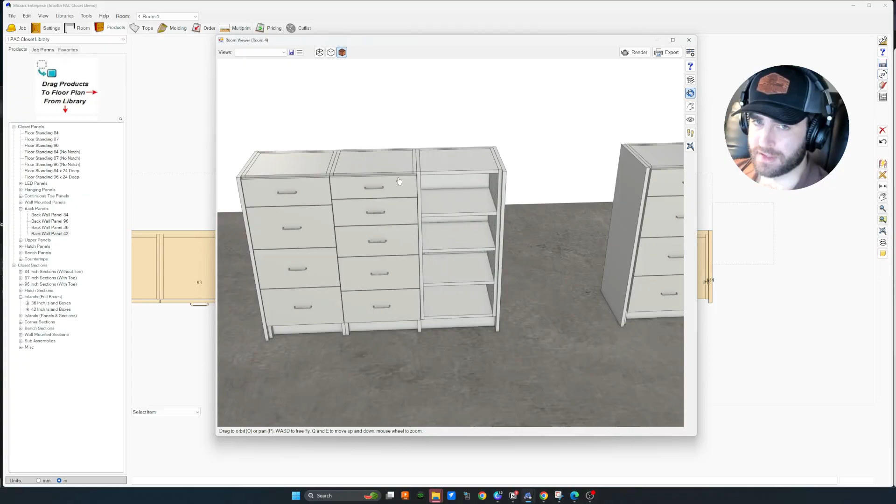Right, we're gonna have more fun with island cabinets. So, PAC closet library sections and panels. So this is the other version; over here to the left is full boxes. There's a bunch of videos on that, 2.5 to be precise. And then on the right here, we are going over how to lay out and manipulate these panels and sections. And I'll try to make it short and concise in case you're using this as a reference document.

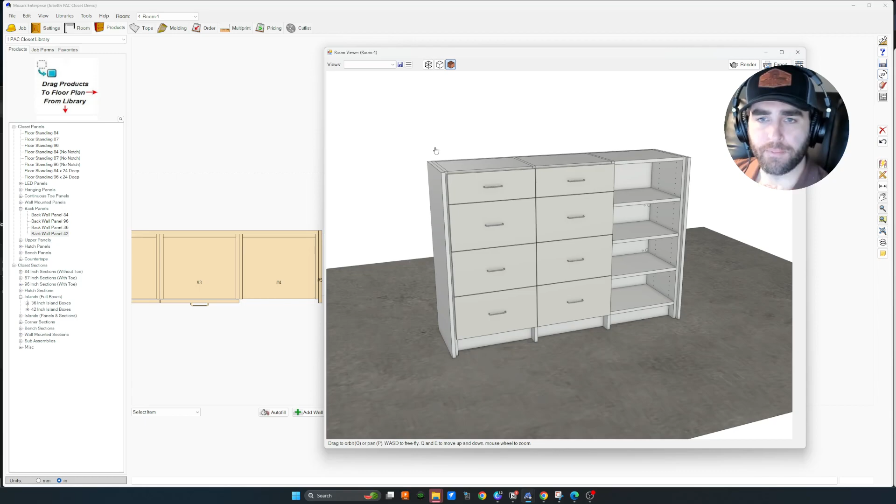So, if we look at this in wireframe, it looks exactly like all the other perimeter cabinets, aside from our full back. So we've got full line bore, we've got outriggers in the toes, everything's looking good. It's kind of built like the full back cabinets, right? So you're going to build this whole island basically on its back and then roll it up, because otherwise it's going to be very hard to put this puppy together.

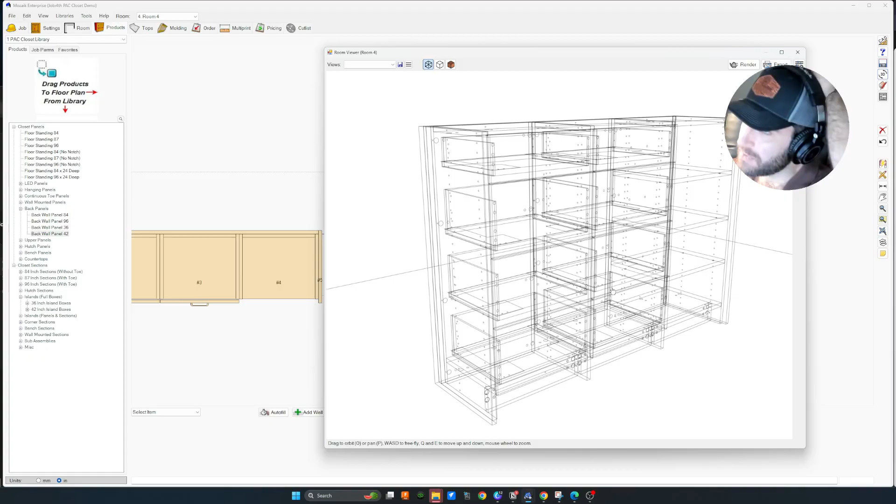And remember, the only reason we're using panels and sections is if we want to hold to the shared panels, or we're looking to flat pack these and send them out to the job site. You could, in theory, actually just put this one together in the shop and then send it out. So whatever you want to do. I would try both and see which one you like if you're new to the game.

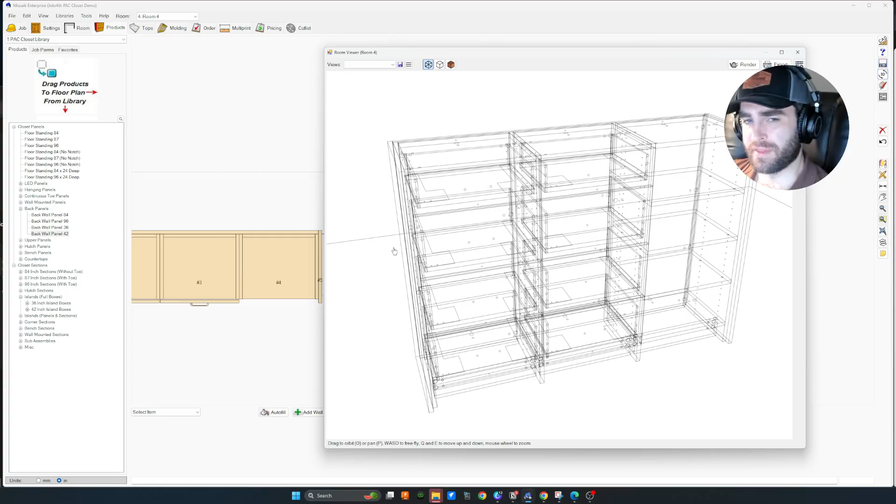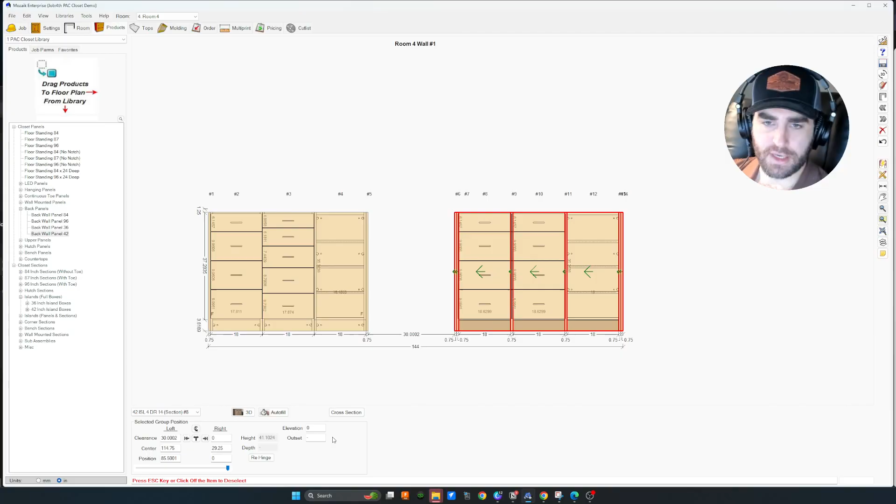All right, so there's not much to change here. They come out the way they are. With the full boxes, we have a bunch of options. With these ones, they are what they are. Now, if we want to lay this out, I'm going to click on this one, go in elevation. All right, let's build this again. So we're going to delete it, and I'll show you how to build out these panels and sections. It's actually really simple, about as simple as full boxes.

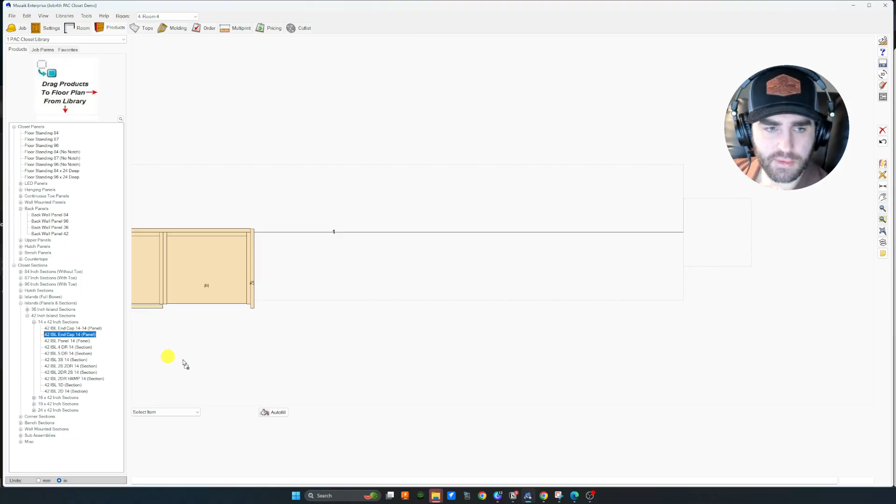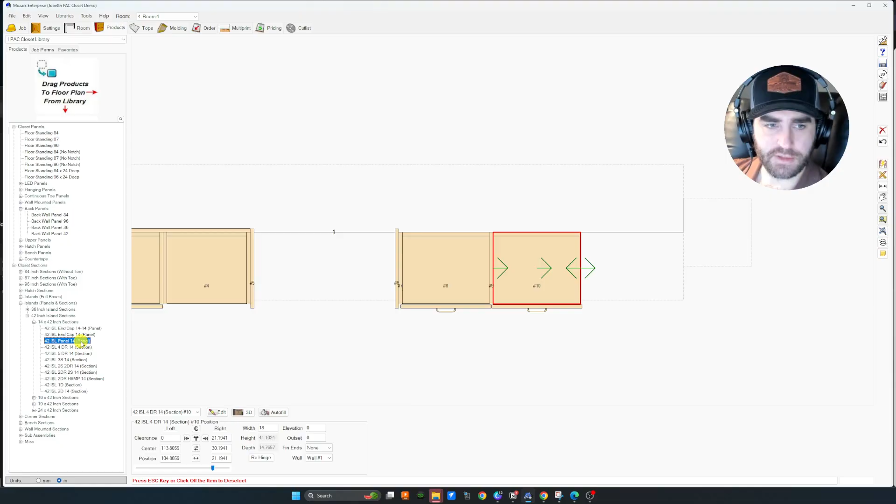All right, so we'll go into islands. We'll go into panels and sections. I'll close up full boxes. Go to 42 and the 14 deep. And then we have this single 14 cap. And then we have a panel. And then we have a section. And then we have a panel and a section, then a panel. Super easy, just like the other one. Kind of like having panels next to sections.

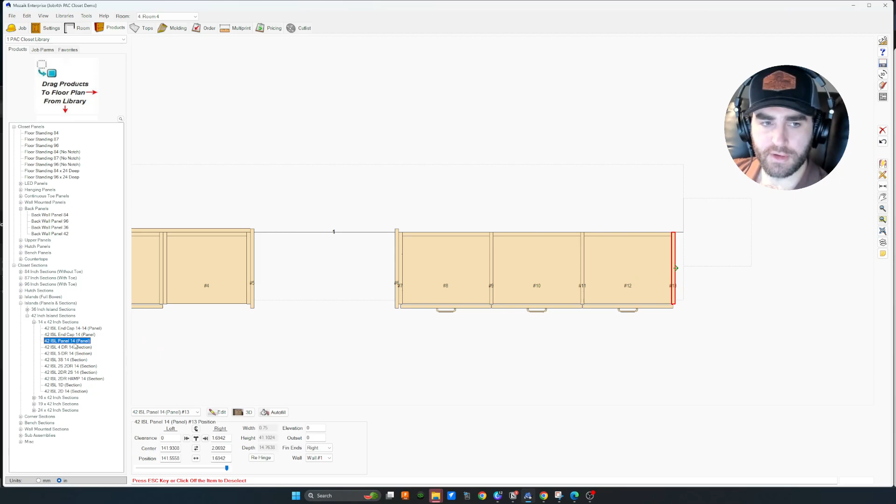All right, bring our section over here. Clicking on the photo instead because it's not really wanting me to pull this out, which is fine. You have to end the section with a panel and an end cap, and then we can put our back on.

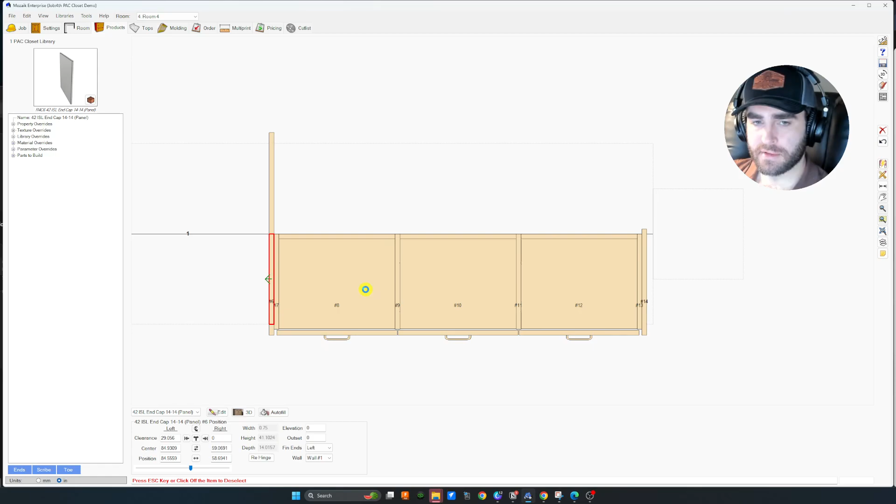Now, maybe I don't need to do a separate video for two-sided. Literally the only difference is if we don't have this single, we have a double. That's what this end cap 1414 is for. And when it comes out, it's basically identical on the back side so that you can put a 14 back there. But I will make another video on the end caps. Hopefully you're just doing a 1414 for now if you're doing a double. Okay.

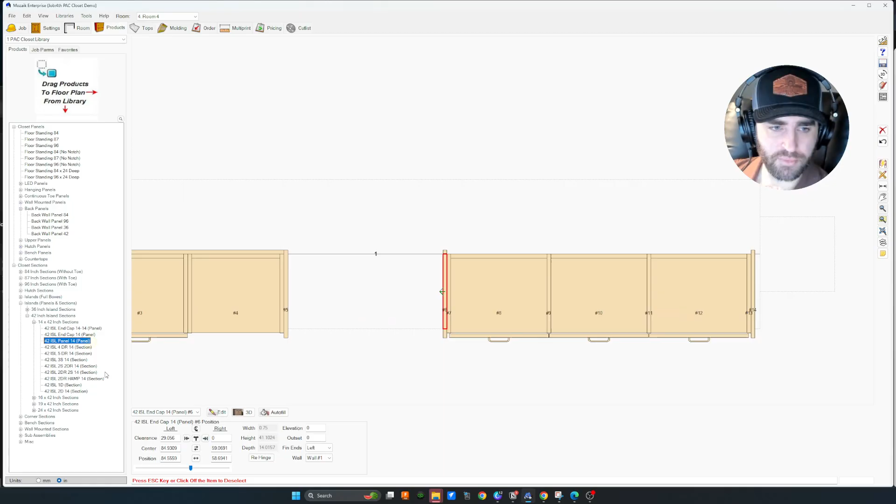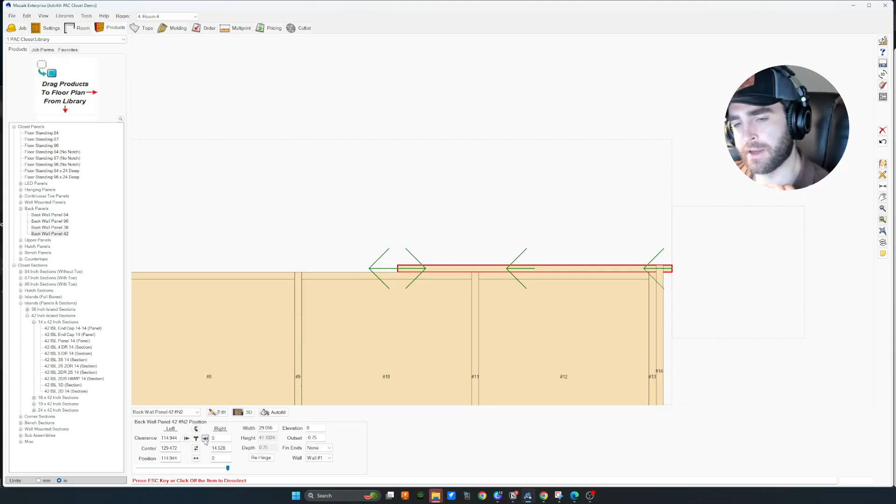So I'm going to put this back. And we're literally almost done aside from just putting the back panel on. So super simple. I'm going to go up to panels, back panels, pull in the 42. I like to pull it in on this wall. Give it a negative 3/4 offset. Drag it over. And then if you notice, if you bump to the right, it's not going to collide with these end panels. It has no idea that's there because the red bounding box is not in the way of it.

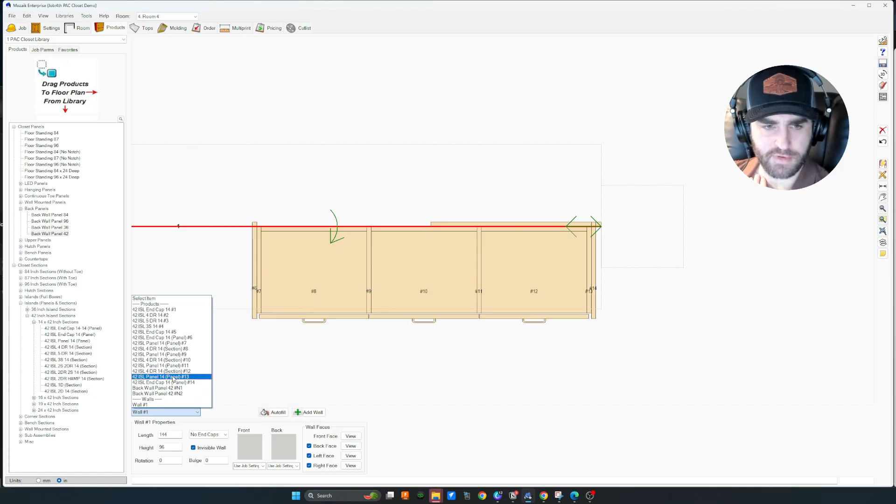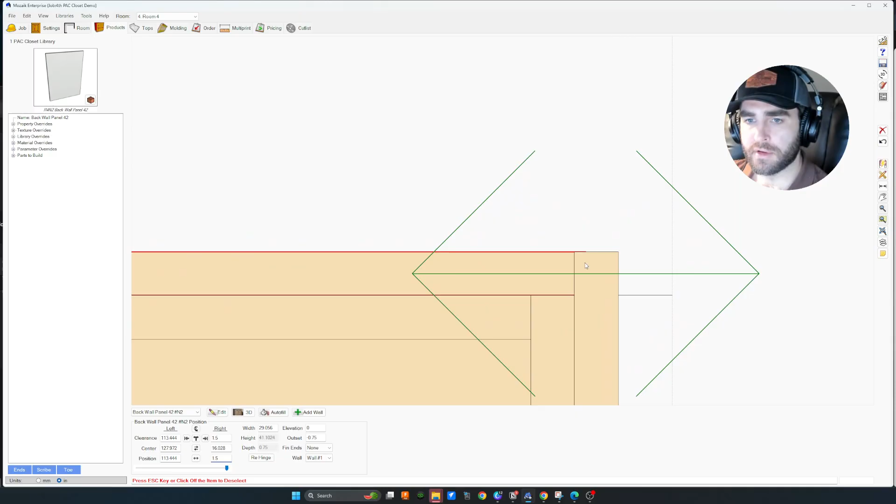So we're going to take that back panel. I can't select it because I'm in product selecting hell. So I'm going to go here to the drop down menu and then we'll just find back panel. I don't know if it's 2 or 1, number 2. All right, so the easier way to position this, instead of sneaking up on it with the green arrow, no one wants to do that. So you could dimension from here to here, go down here to the bottom, just say 1.5. It's going to move that over. Looks like it's overlapping. So if you want to know the exact number, take the dimension tool.

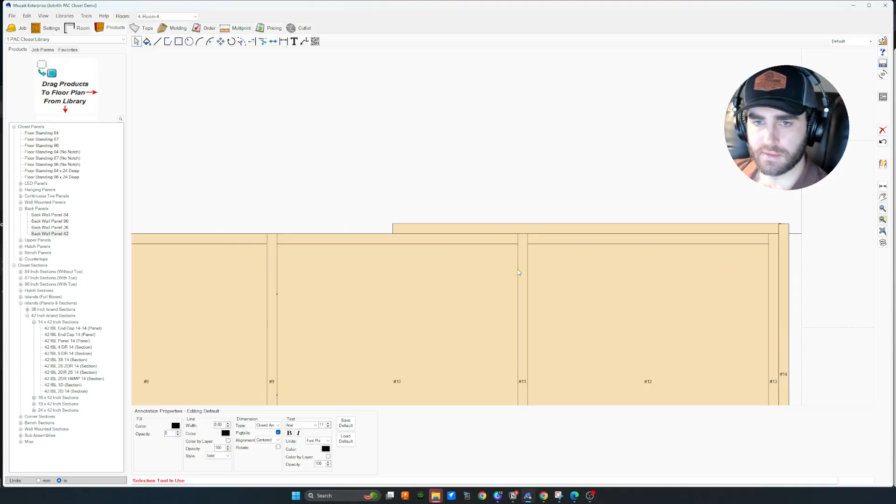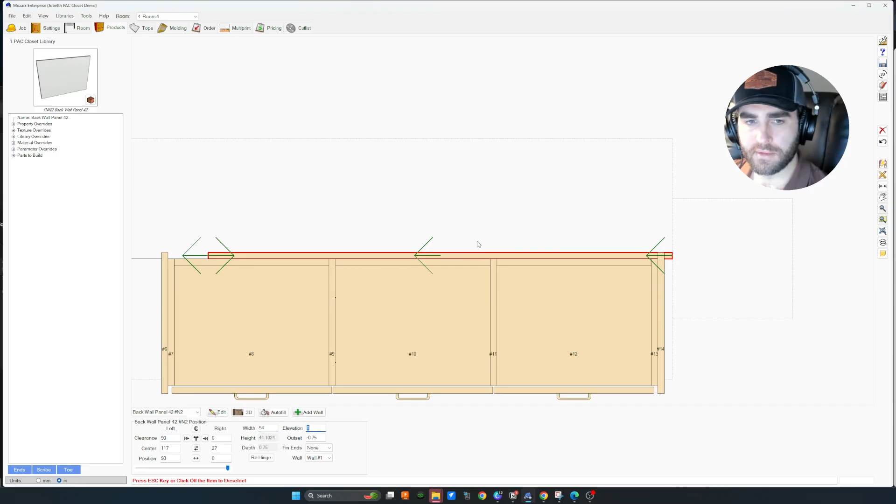1.69. Okay. I'm going to select this panel. I have to get out of the viewer. I'll select that panel again. 1.6492 or something. I don't know. Close enough, because we already know that this is 54 inches wide. We're just satisfying drawings ourselves if we do anything more than that. And I'll change the position again, 1.642 whatever. Dude, it looks like we got it wrong. So 57, fine. Okay, it was 57 tall.

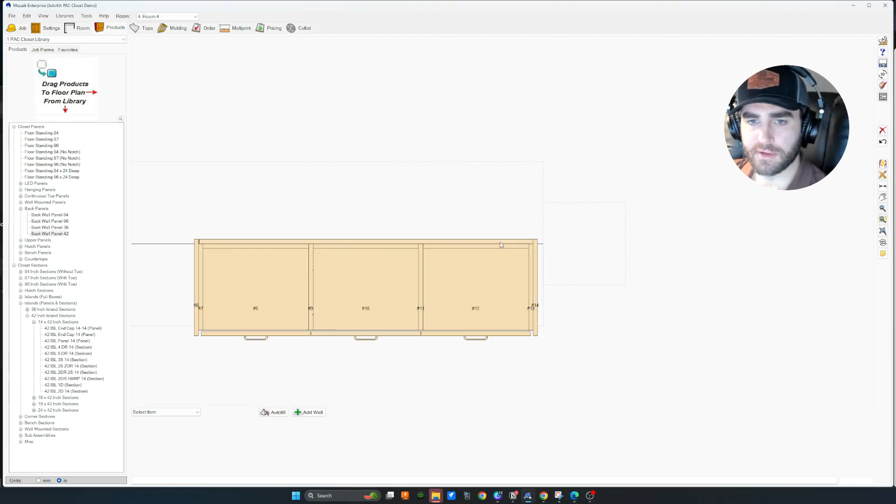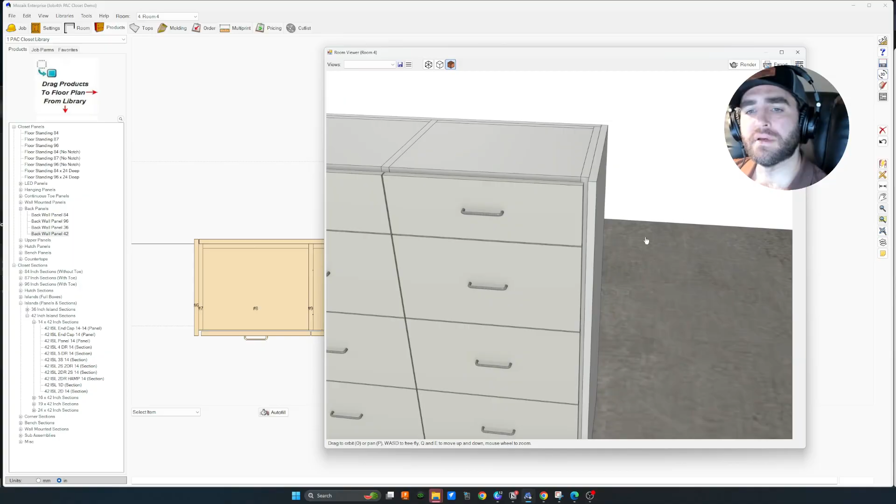Now, if you're doing a bunch of work here and you're sick of trying to click on that back panel, like I kind of am, you can just artificially set it up in the air, 50 inches or something. It's still hard to click on in the plan view, but if you go to elevation, you can just click on it, go back here, and then go about your business. We're finished with it, so I'm going to put it back at 0 elevation. That's all there is to it for a single panel and section for the islands. Pretty simple.